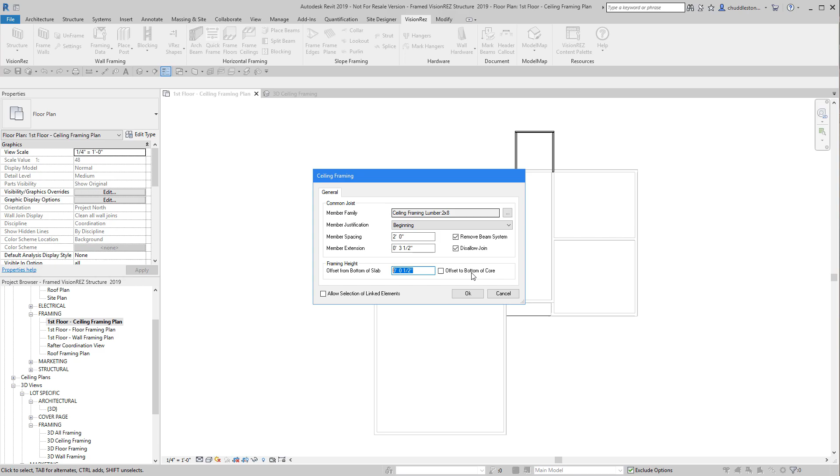We're going to give this a positive 1/2 inch above the sheetrock that we're applying framing to, so my settings are correct. I'm going to say OK, then pick the 2 locations that I know have 2x8s in them and finish that out.

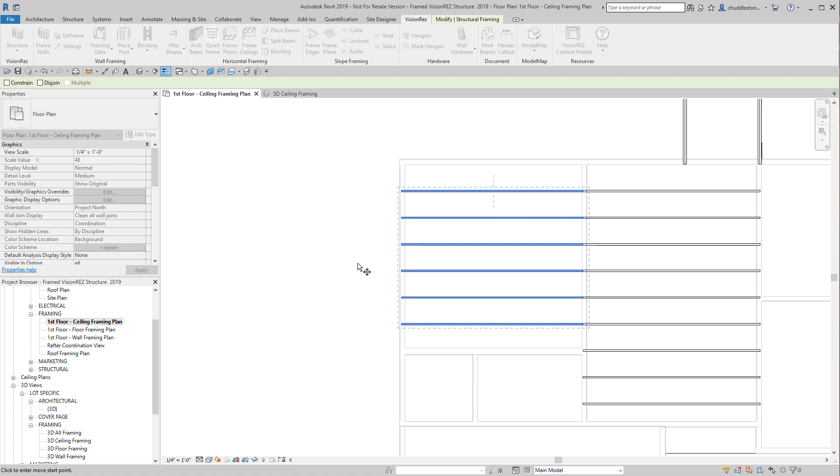I need to move these because they are directly on top of the other ones. So I'm just going to pick those right there - whoops, got too many. Pick them from here, and then move them with the command MV, moving them down 1.5 inches. Now we have a good overlap right there.

Next piece we're going to talk about is the lookouts. Lookout is going to add the blocking. It's on our slope framing panel, but it has a twofold use. So what I need to do to crib out these sections is copy these over so I have something to add blocking across from.

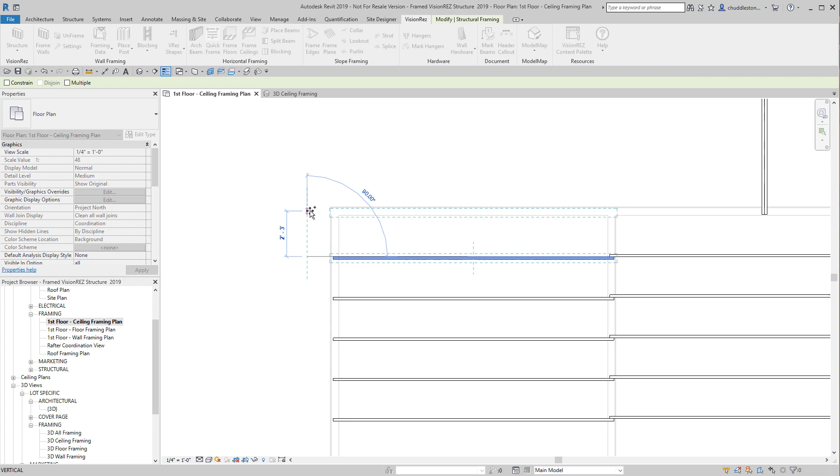If I just move these over using the copy button and get them in a general location, I can come back and get them right on top of one another so they'll be similar in size. When I pick the lookout, I can pick a ceiling framing lumber - these are 2x8s. Again, it picked right up where I needed it to.

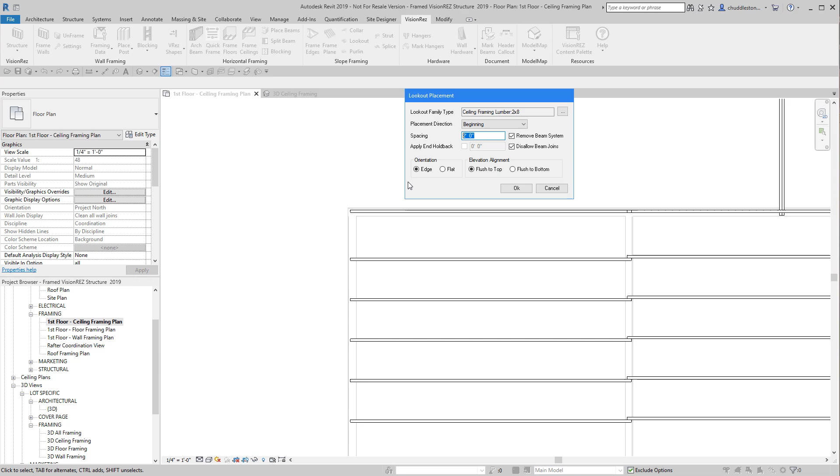I want to start at the beginning, at 2 foot on center. Same settings again - I don't want it to join to anything, and I want to remove the beam system. There are 2 other options here to be flat or flush to bottom; we want them on edge and flush to top.

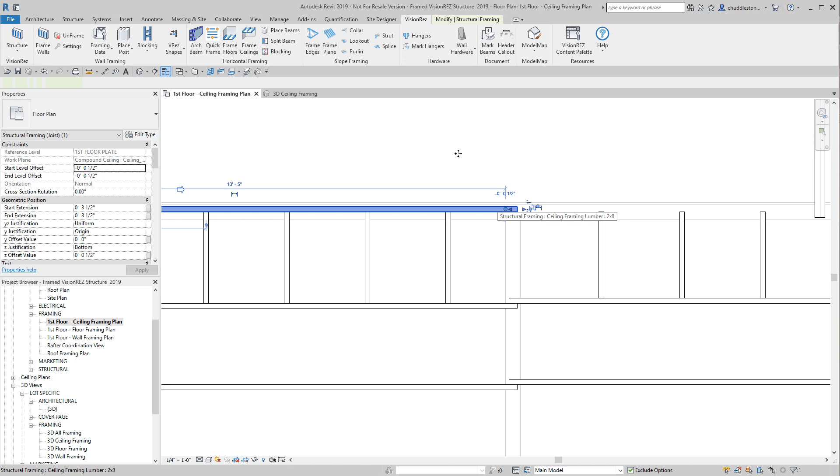So when we apply these, we pick where we want it to start from and where we want it to go to, and it applies that. If we stay in the command, we can come over to the side, pick where we want to start from and where to go to. To finish this out, we'd delete these outside pieces since we don't need them - these would sit on top of the wall, and later we could line them up with the rafters above.

So I'm going to finish framing this out, and I'll be right back, and we'll show you how to add framing to another area.

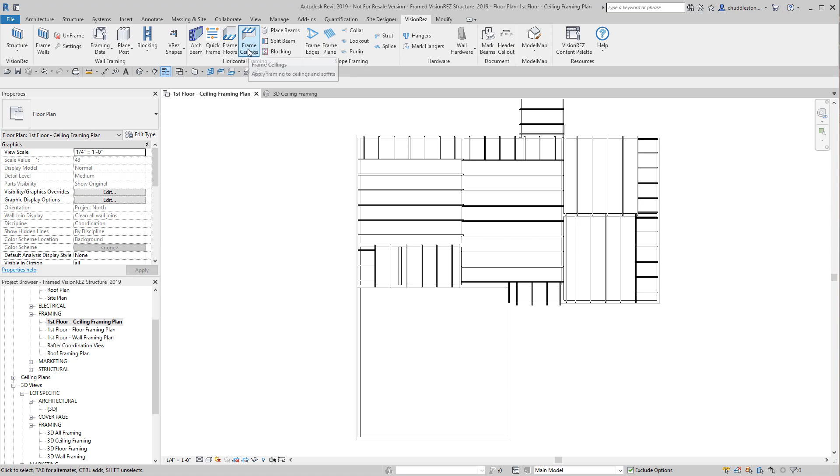So as you can tell, I've framed out the rest of the house, and now I just have the garage to finish. So I'm going to use the frame ceilings tool, and then pick a 2x10.

It needs to start from the beginning, but because it's such a long span, I'm going to change this to 16 inches on center. I'm going to leave the same settings as before and leave the positive 1/2 inch up so it'll lay directly on top of the sheetrock, and then we'll say OK.

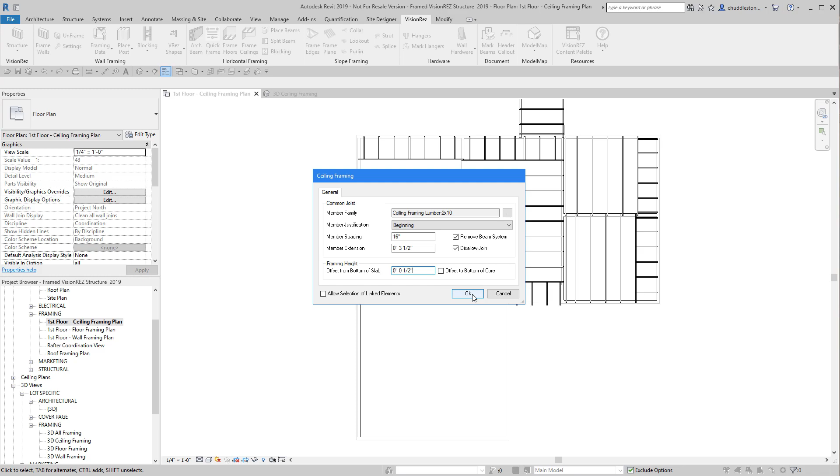Pick our area, say finish. Due to the length of these, we need to add a strongback in this location, so I'm going to use the place beam tool, and we're going to do a raised portion where it sits on the very top.

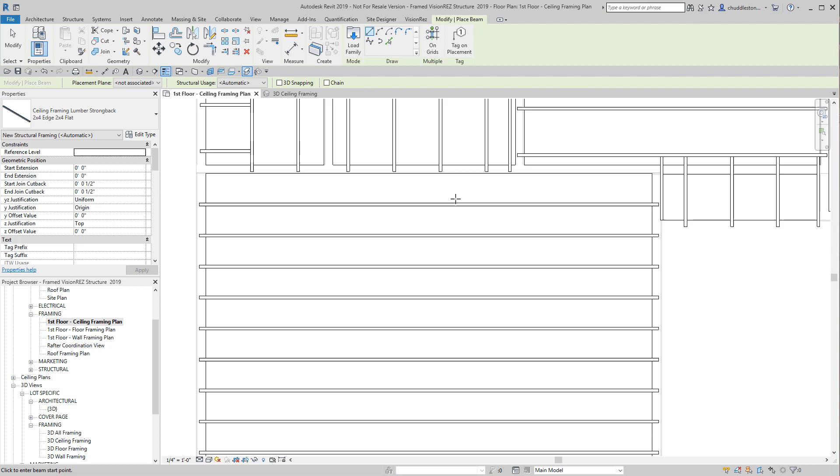We're going to say OK, pick all the items that we need to carry, say finish, and I do not need to save right now. Then I'm going to pick the strongback that I want, 2x4 on flat, on edge, and give it a location.

It looks like it's below, but if I hit escape, it actually brings it to the top. If I need to move it over, I'll use the nudge keys to move it over just a bit. This is what it would look like in 3D.

We have our members placed in there correctly. We have everything cribbed out correctly on the edges where the rafters would meet. And this is the ceiling framing portion.